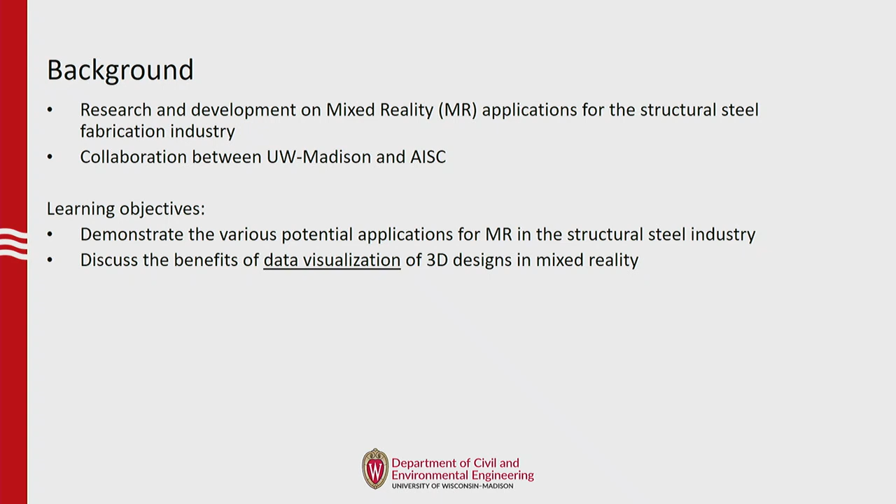So when we have holograms and they're overlaid onto the real world, we're augmenting the real world. That's AR, but ours is a little different because our holograms are going to interact with the real world. So that is mixed reality, because we're augmenting the real world and they are going to interact with each other. And if anyone here is not very familiar, this is different to virtual reality, where in virtual reality you're entirely immersed in the virtual world.

We need this mixed reality for safety reasons. You have to be able to see what's going on in the fabrication shop around you, and so that's why we're using this technology. Now, the most common mixed reality headset is the HoloLens 2 by Microsoft. You can control it with hand gestures, so no remotes, which is really good because you're going to be working with your hands when you are fabricating parts.

It's fully self-contained, so the HoloLens can work on its own, and Will will explain that. And also, you can connect wirelessly to other users or other devices. So if you have a project team in the office or elsewhere, you can collaborate with them in real time.

So first, we had an initial pilot study, which was supported by AISC's research and technology divisions. This was a nice collaborative project between structural engineers, me, and software engineers, Will's team. And we found that we could get a 1/16 inch accuracy of the hologram overlay onto the steel parts. That really told us that we could go ahead and continue with this research, because that was the minimum accuracy we needed to achieve to make this viable.

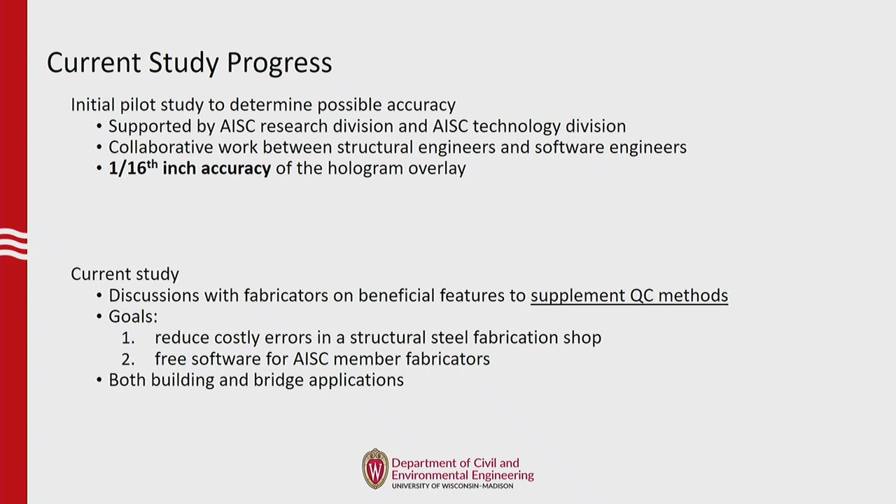Now, the applications we're studying are both for buildings and bridges. The demo you're going to see here today is a common bridge application, but we are looking at both building and bridge applications.

So the HoloLens 2 can overlay relevant information on the part that you're fabricating and assist with quality control checks. This can include bolt hole misalignment, incorrect edge distance, and it can display dimensions and measurements.

In addition, you can measure distances between points of interest. You can select the points and it can give you a measurement. It can also show you the correct orientation of the parts to be connected.

What's nice is the display of the user can be live streamed, so you can live stream it to someone in the design office. You can see the shop drawings in the HoloLens. You're going to see this in the demo.

And you can do voice to add a note at a specific part. So if there's something you want to note, you can use your voice and add that in.

Table layouts let you do a quick check of the individual parts. There's also a step-by-step guide to help you fabricate it. And what's nice is you can pull apart this finished connection to familiarize yourself with the sequence and how things go together, so you can be familiar before you actually start welding and drilling holes.

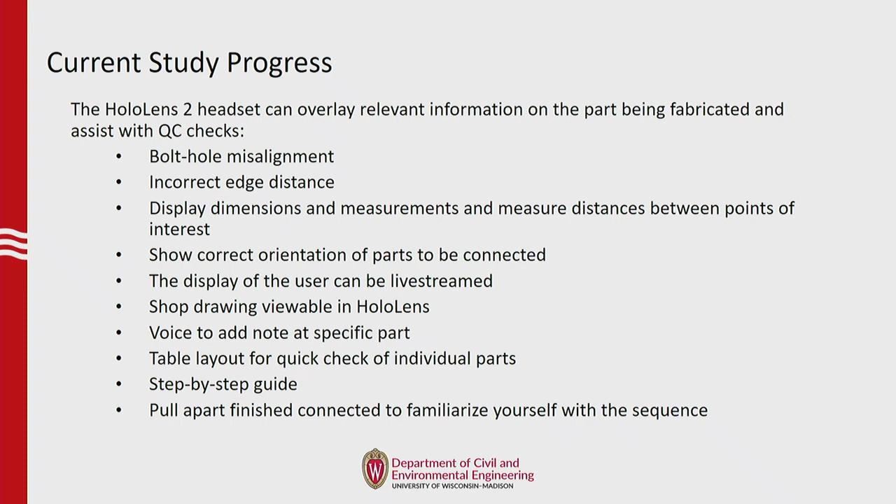This demo here is a scaled down version of the connection, but all the features will work fine on a scaled up version. With this, I'm going to turn it over to Will, who's going to give you a demo of this with all the features that we just mentioned.

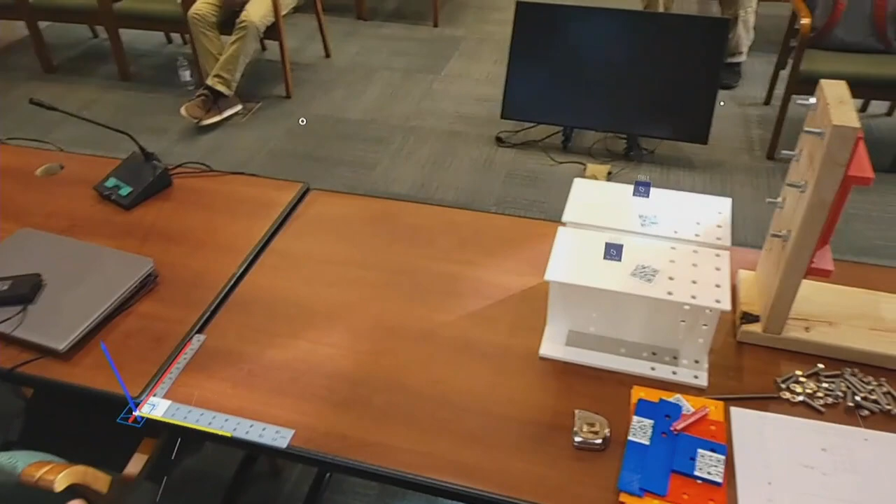All right, so this is a steel fabrication application. It is designed to help out fabricators right on the shop floor. Working with AISC and fabricators from around the area, we're trying to determine where it makes the most sense to ultimately improve the efficiency of a fabrication floor, but also reduce the costly errors that arise out in the field after it's left the shop.

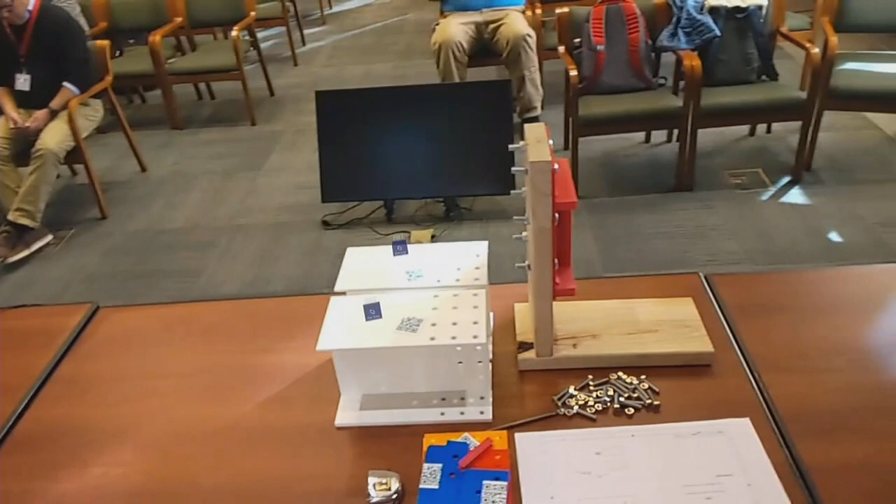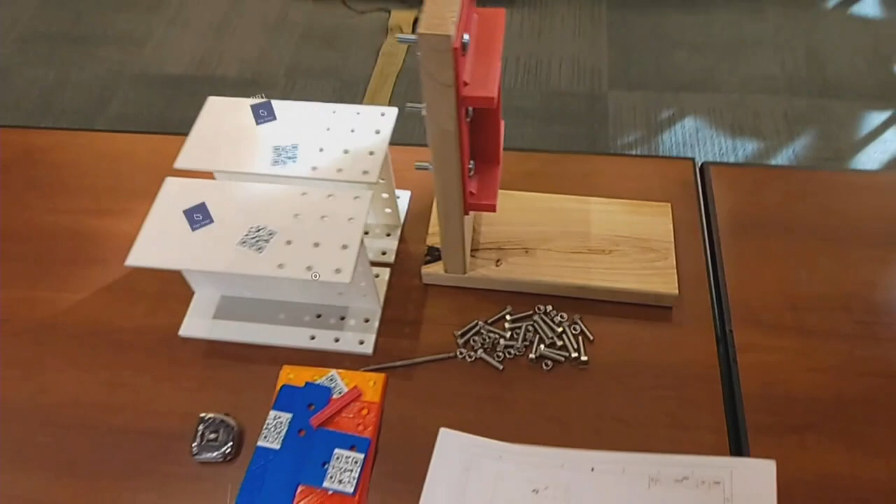So we're trying to catch all those issues before it leaves the door, and this is kind of where we decided to start, at least for this application. So we're actually starting with the shop drawings. You'll find that you have the shop drawings along with a bunch of the different pieces needed to make everything in this fabrication. It's about 6 pages long, and to keep the space a little clearer, we decided to add the shop drawing right into the HoloLens.

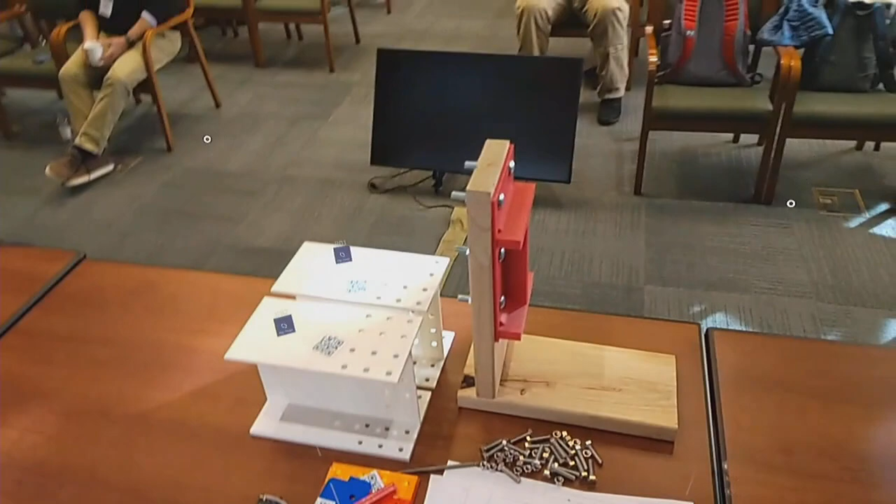So you'll recognize there's a bunch of QR codes all over, and that helps with alignment. That's how we're able to transition from the digital to the physical world. You can also just read things. I feel a little close with this one, but you can bring things up, and we could potentially add a QR code right to the shop drawings, and then there they are. You can get up pretty close to it. It does follow me around currently, until I just pin this here.

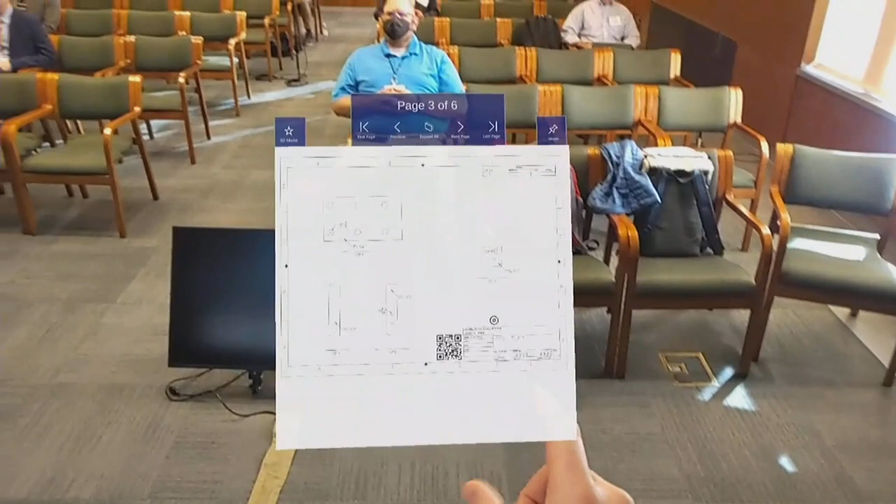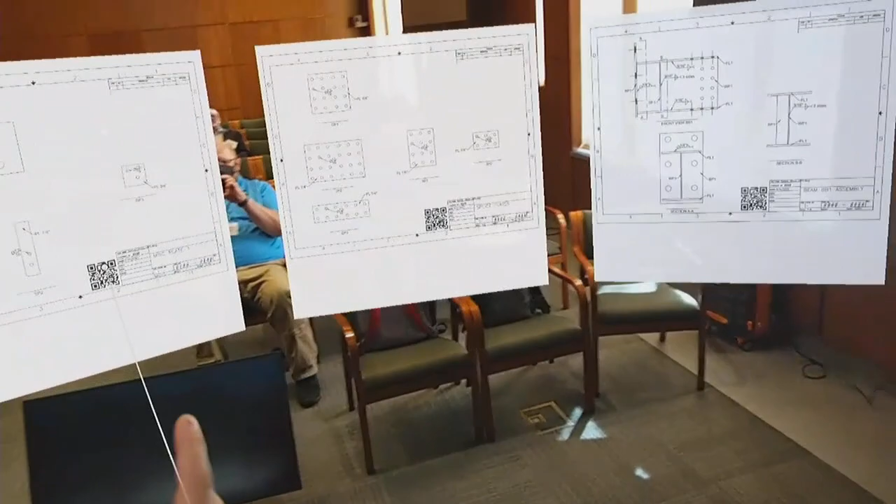And then you can toggle through them as you'd expect. So you've got all 6 pages there, or if you wanted to, you can expand it. You've got all 6 pages all together. Kind of intense, maybe a little overwhelming, but you're able to have everything out that you might need. You can expand it, make it as large as you need, and find what you're looking for a little quicker without cluttering your workspace. So there's all 6 pages. But again, that's still not necessarily our ultimate goal.

Our ultimate goal really is to take the existing files done by designers and give all the information that's still in those to the fabricator. Right now it's kind of being lost by just being in 2D. So we're going to bring up the 3D model here that I just put up.

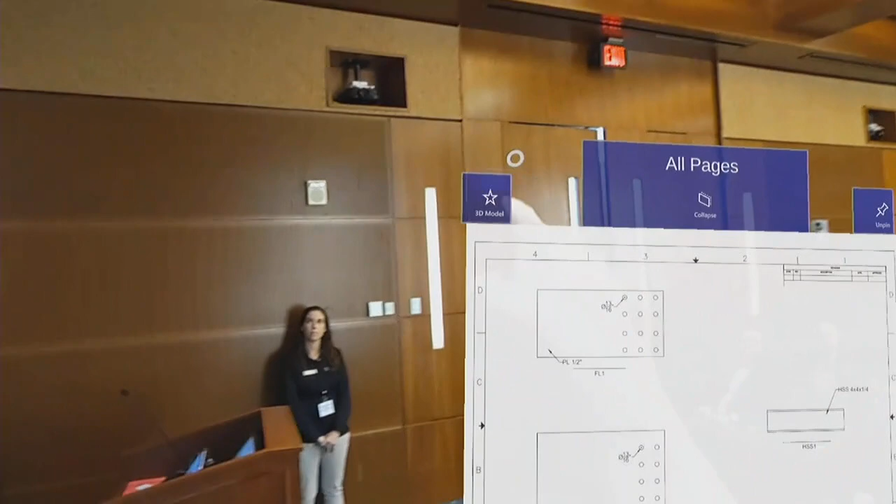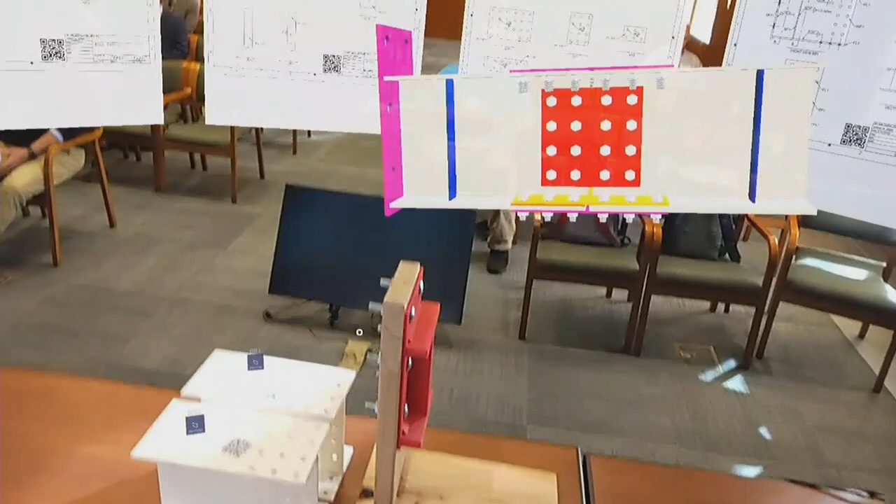So this is ultimately what we'll be building today. And with the HoloLens, you're able to just pick it up, move it around, interact with it. It's weightless. I learned that steel is heavy, heavier than I expected, so that's why all these are 3D printed parts. They travel better. But you're able to interact with things and get a better understanding of what you're fabricating right off the bat. We also added another feature to interact with the different parts.

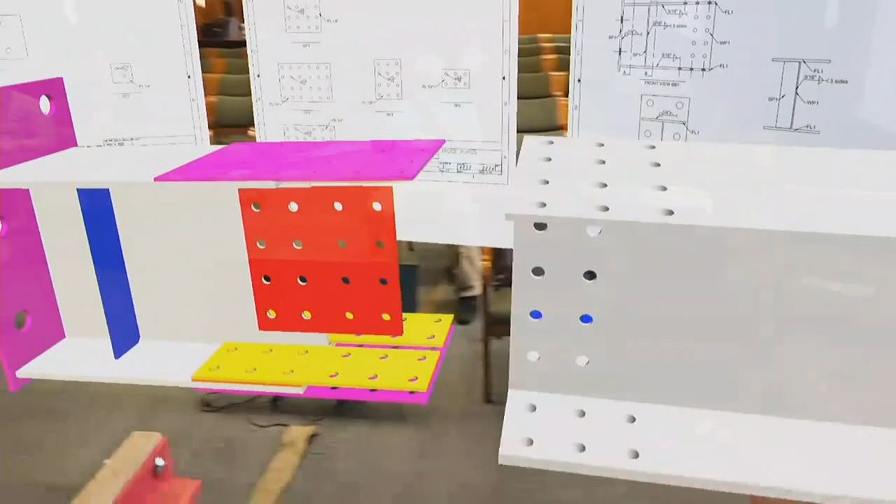So if you don't necessarily know how this goes together, if you're a novice fabricator, you're able to pull things apart and see, maybe in reverse order, how I'm going to fabricate this. This is more of a bolted steel connection, but if there are more welds, you might be able to interact and figure out what needs to go in which order. And work with this in a weightless state. It also creates kind of cool art too.

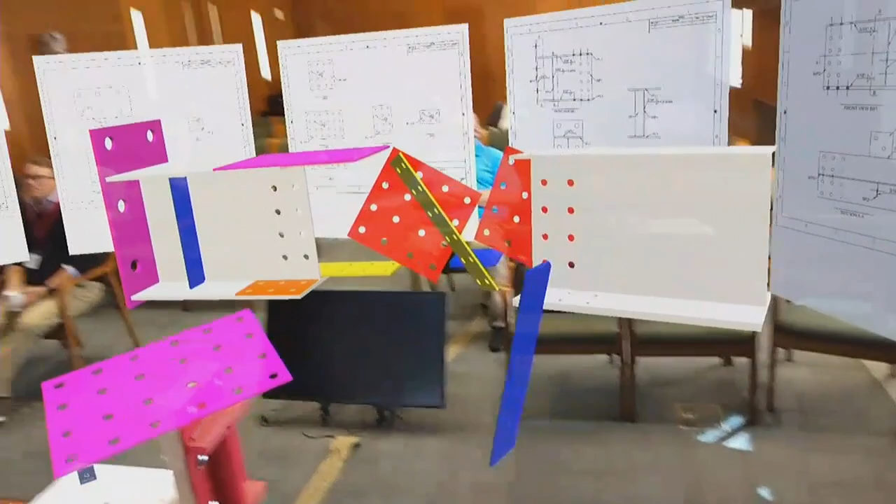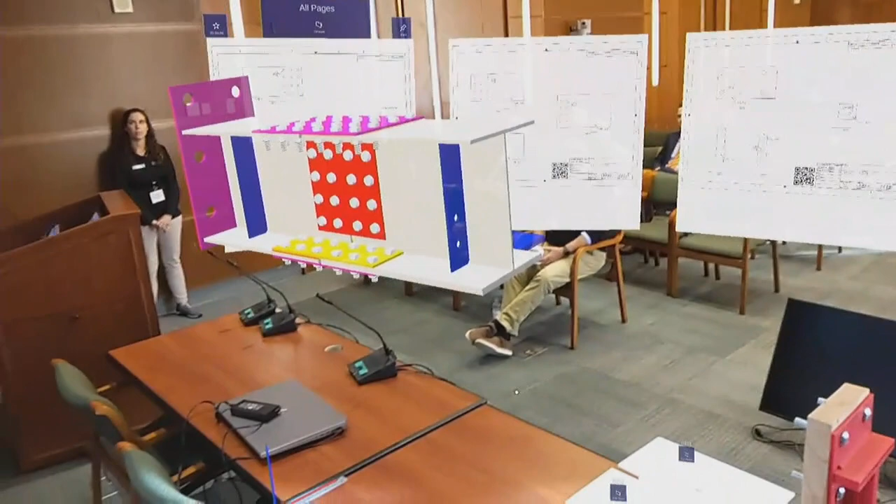All right, so that's the interaction. I'm going to turn that off. And then I'm going to turn that model off for now. So now we know what we're actually designing. I'm also going to get rid of that PDF too. Now let's actually fabricate it.

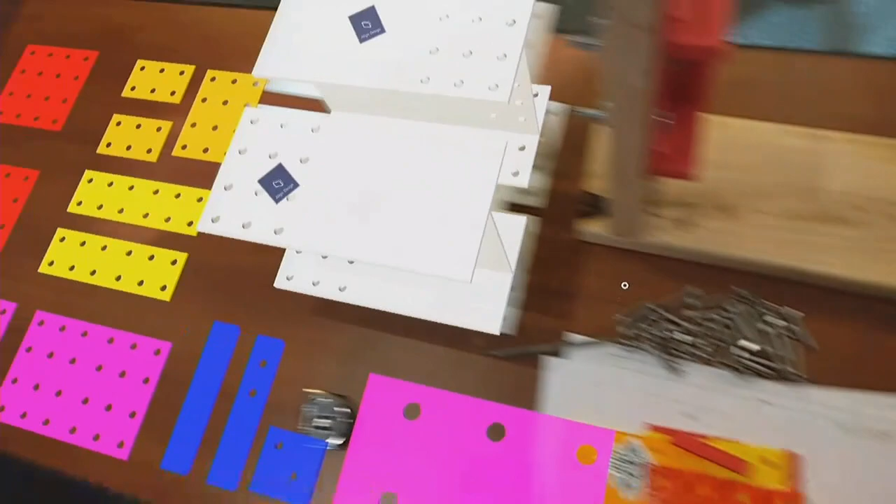So once again, you have all these different pieces, and you have all of the design information still in the file in the HoloLens. So what we could do is lay out all the different pieces on our table here to the exact size that these pieces should be. That allows us to do a quick QA/QC of all the different individual pieces. Let's see, basically start laying them out, make sure that they actually line up, and they should perfectly match. This is just a very quick way to make sure that we have all the pieces in the right size, the right shape.

Good, all the pieces, very good. But it's a very quick way to make sure that your pieces are actually fabricated correctly before you start welding it onto your final fabrication. So pretty good, awesome.

One looks like a potential problem. We do have some misalignment here, it looks like on the bottom. These rows look a little further down than they should be. We can revisit that in a little bit. These two line up, they look pretty good. Awesome, okay. All right, looks good.

And then that final piece is right up there for the sake of time. So here are all the different pieces. It's all laid out, it's looking good. Everything looks like it was actually manufactured correctly. Now we should investigate this last piece here because it's just a little bit off.

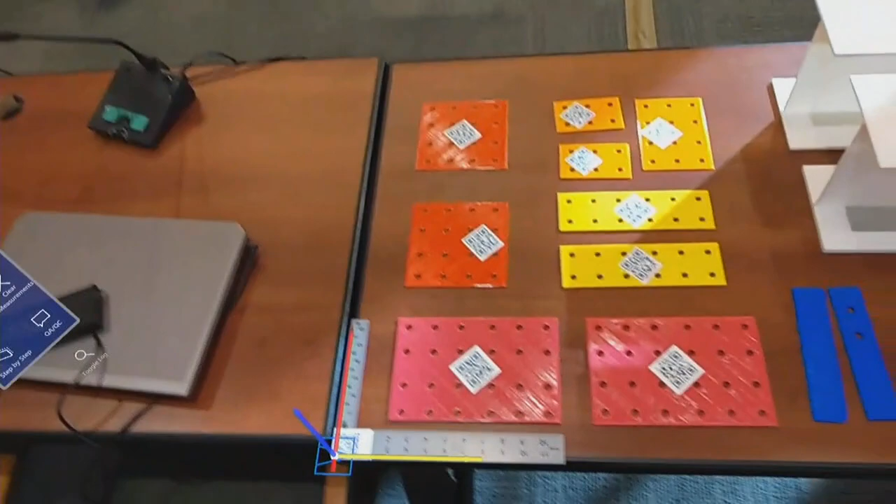As Dr. Blum mentioned, you can pull up some measurement points, is what we're calling them. Essentially what we're able to do is put this in line with the calibration square that we have there, and we basically say this is where we're measuring from. You can put this QR code basically anywhere on any of the pieces, and this is how we're able to align the two to get that 1/16 of an inch accuracy between the digital and the physical world. Keep bringing up the start menu.

All right, so there's the alignment, and that is pretty telling that there's definitely a nice alignment of those holes down here. We can even dig a little deeper if we want to, and bring up what we call our measurement points. Again, these are all just kind of wherever we see an important space that maybe needs to be interrogated. So we have center of holes, as well as edges.

For example, I'm going to make, let's see, we'll do these two here to try to get that center. This is another fun part that we're currently trying to fix, is spaces selecting these measurement points.

All right, so that's 5/8 of an inch. And so if I turn the overlays off here, and the table, all right, we can do a measurement quick, pull tape, make sure that we actually do have a correct piece. Definitely not 5/8 of an inch.

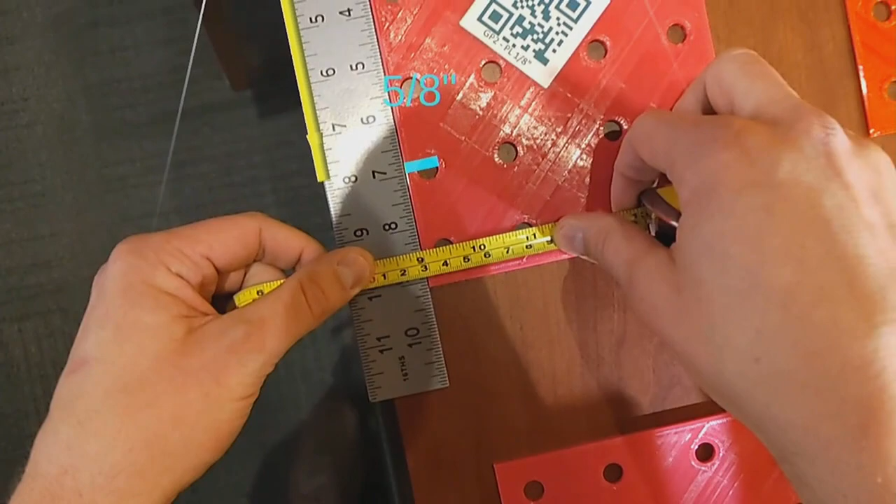I'm not sure how well you can see that, but basically, if we need a new piece, it needs to be fabricated. Dr. Blum, could you hook me up with a fixed piece?

That would be... There you go. Awesome. How did you do that so fast?

Incredible. All right, so let's go ahead and go line this up again. It's already looking better, but we certainly can also do a measurement here of 5/8, and we're all set.

Okay, so all the pieces, they're all set up. Once again, I'm going to just clear that measurement, and then we can bring back our table layout. All right, so we have all the pieces, they're all set up, we're all good to go.

Good. And let's finally fabricate it. So for this next part, it's a step-by-step tutorial.

We have our steps up here. It's all again in 3D. You can include this in some design files. This one has it, so we have the steps. The first one we've already done, we've already anchored that piece to the strong wall. Now this might not be exactly how you fabricate this together, but these are the steps I took.

All right, so the first piece, we're going to look at which pieces need to actually go in this step. So we're using this high-yield beam here, and we're going to place this and do the fastest weld on Earth. There it is. Whoa. And all right, that's step one.

Step two, got the two red pieces. They're flashing over here on the table, making it pretty clear. Obviously, steel is not all wonderfully colored like this, but all the pieces can still be given a color maybe, or you can have a way to label them. This is just ease of demonstration.

I'm just going to throw that on this for a little more stability.

Can you show us the steps you looked up? What's that? Which step? Step. Yeah, yep, so this is the current step that we're on. Okay, so that's the first step. Okay, yep, yep.

One more piece just to be safe. Excellent. All right, here's how you'll be. Orientation is this way, so go in. Good.

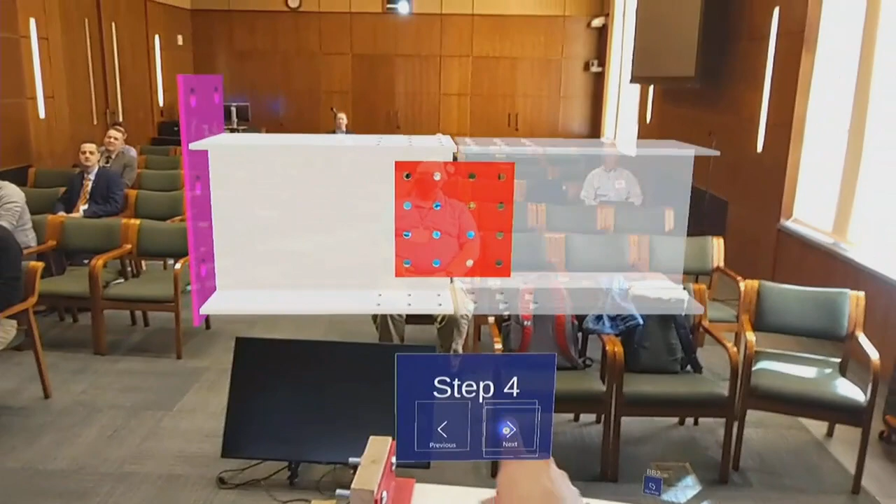Step 4, moving on to 5. All right, so this one. Got these 3 pieces. Now a novice might not necessarily realize that right now there's only 2 pieces that I see that are flashing. So I put these 2 out. You can grab this and we'll just take a look to see what that other one is.

It looks like, yeah, there it is. Excellent, so it's the same plate on the other side. Again, a veteran fabricator likely would know this, but if you're new here, making sure that you're using all of your parts, and you don't get down the road and realize you have to redo a step.

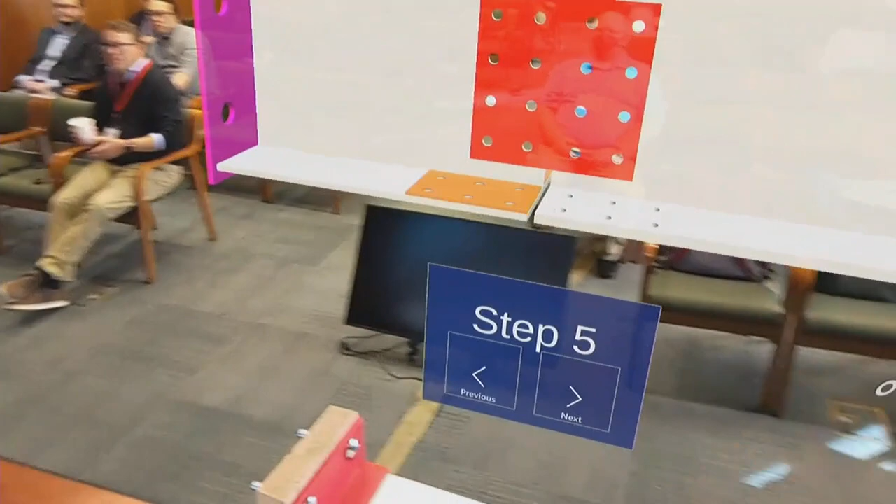All right, got these 4.

You can then reference each model, expected orientation, and which piece goes where. And the last piece, it's going to believe it's on the other side. No, it's there. I'm just going to place it.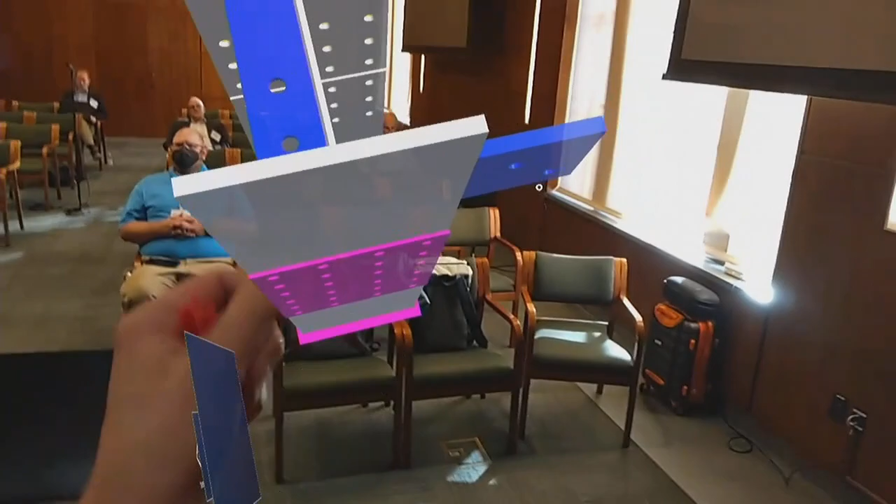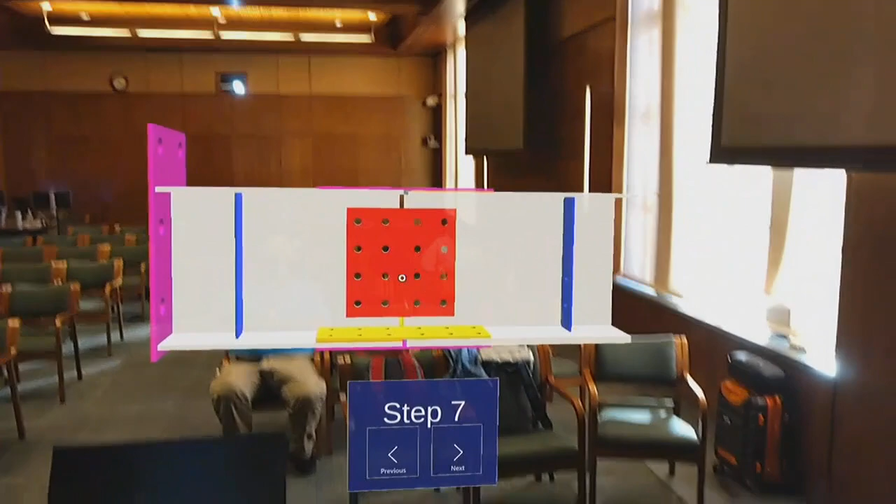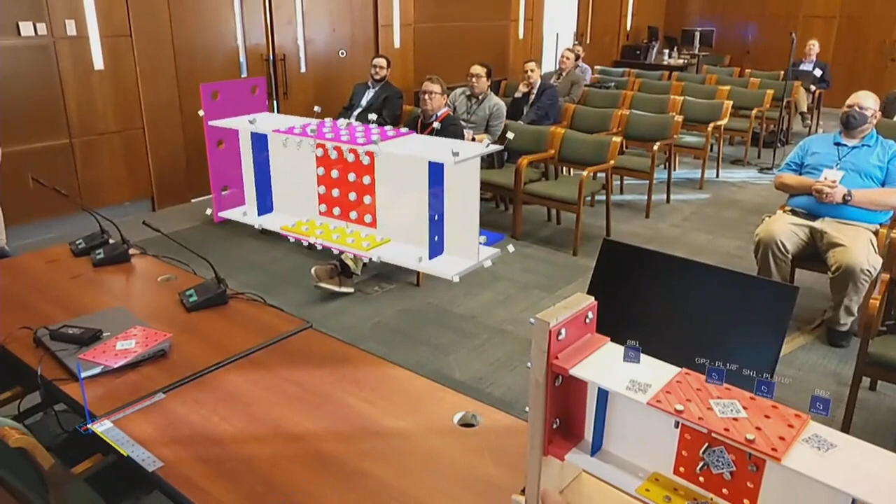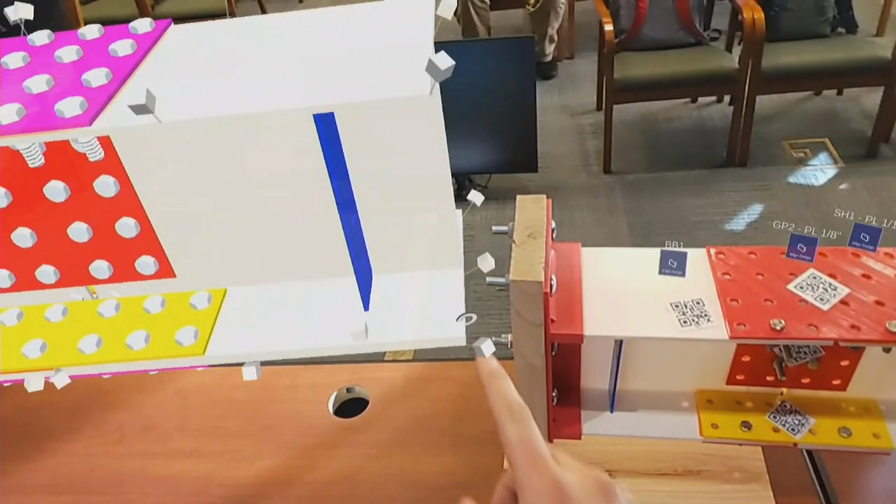The QA/QC feature allows you to ultimately take a look at this final fabricated piece, walk around it, and compare it with the final model. So let's bring up the full design again. With this full design, we have measurement points that you could use as a QA team to do some simple measurements, like this one over here on the end, to validate that it's actually in the correct place. It certainly does not look like I placed it very strategically, but for example, you pull tape and you realize that it's wrong.

And with the HoloLens 2, you actually have eye tracking as well. So everywhere that you look, you can have a cursor, and you can also have a microphone. So you can look at some location, which I'm going to look over to the right there, and say the words 'add note.'

Usually it doesn't work the first time, but the second time it does. Add note. No, it's not there yet. Oh yeah, there we go. All right, add note. There it is, look at that. So that's where I was looking, and then we add a little note here.

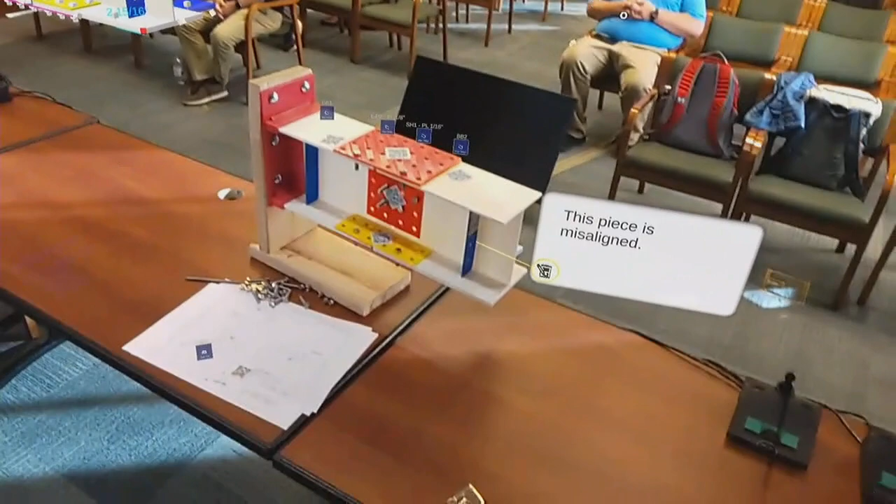We should be able to then do some speech to text: 'This piece is misaligned, period.' All right, simple note. Future enhancements could definitely include a picture, but that's one way to do it, and of course it's going to take a picture.

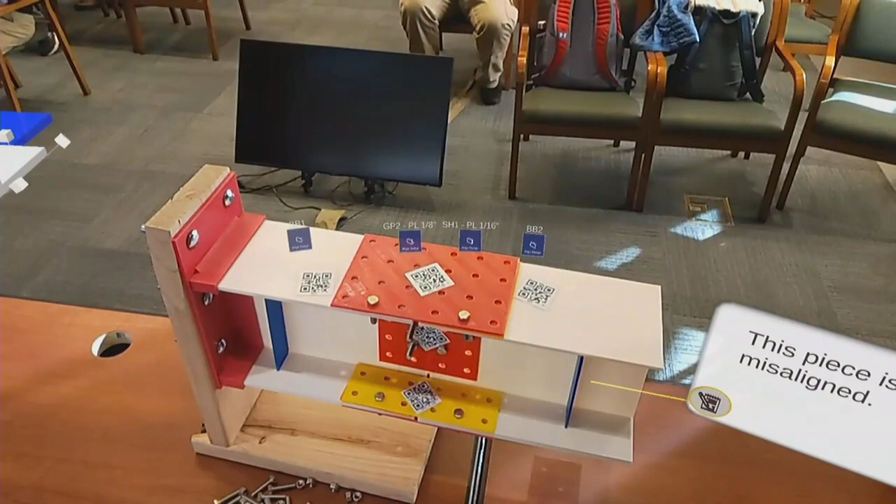We also could look at other places. There it is, add note. Add note. Still a pilot feature, clearly, but again, it's a simple way to potentially walk around the actual finished piece and add simple notes that can be sent back to the fabricators to be fixed.

So I hope, at least through all these little demos, you're able to recognize a bit more about what's possible with the existing files. We didn't modify any of that. This is just data visualization in a different format that ultimately can be beneficial to the fabricator.

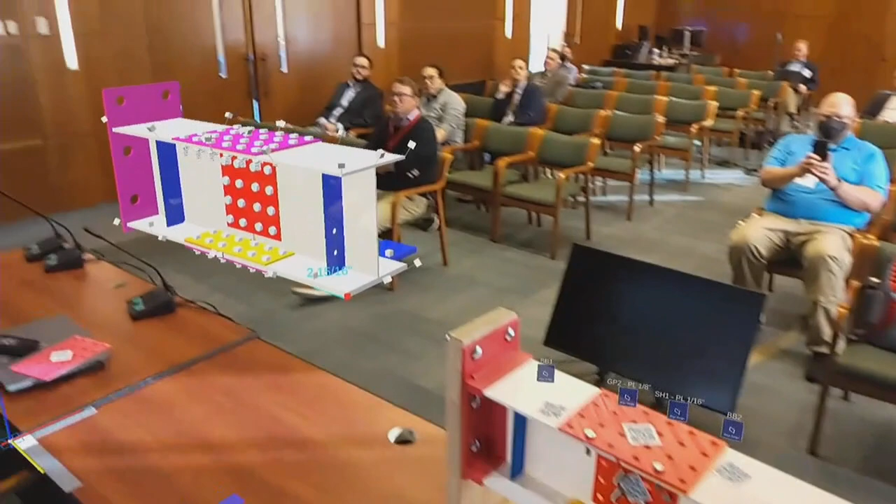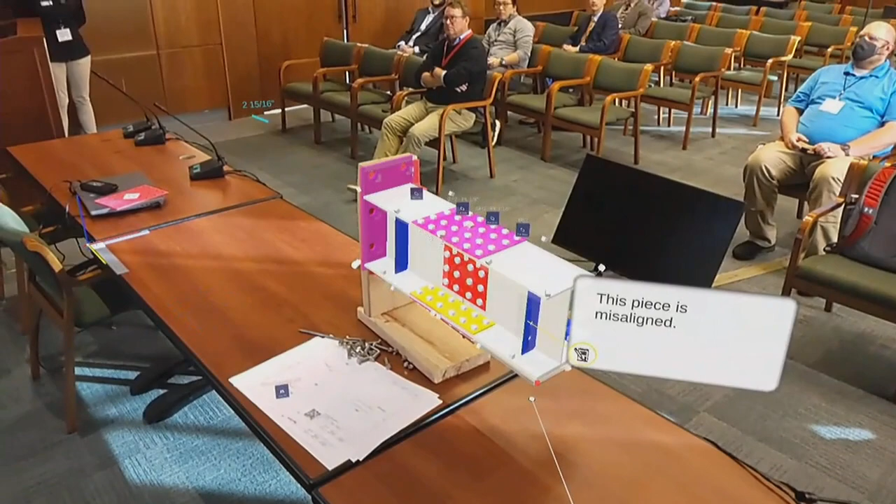I think that'd be something to look at. Yeah, absolutely, it's interesting—because kind of like you do with the parts, you know, right, see it all, yep.

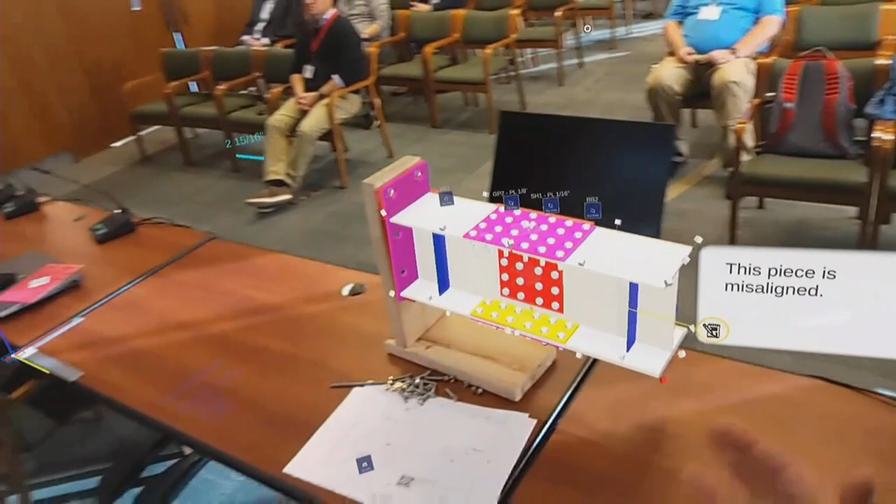The difference with this is, when you wear the device, there is some transparency potentially, and so it's a battle a little bit between seeing the digital model and trying to see the physical. When you lay it like this, it's hard to see, at least in my vision right now, the actual physical object behind it. So having that reference is potentially easier.

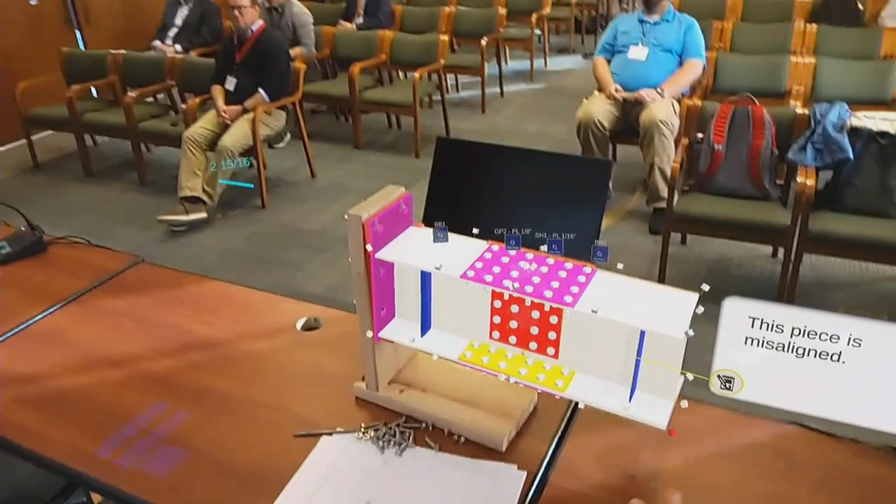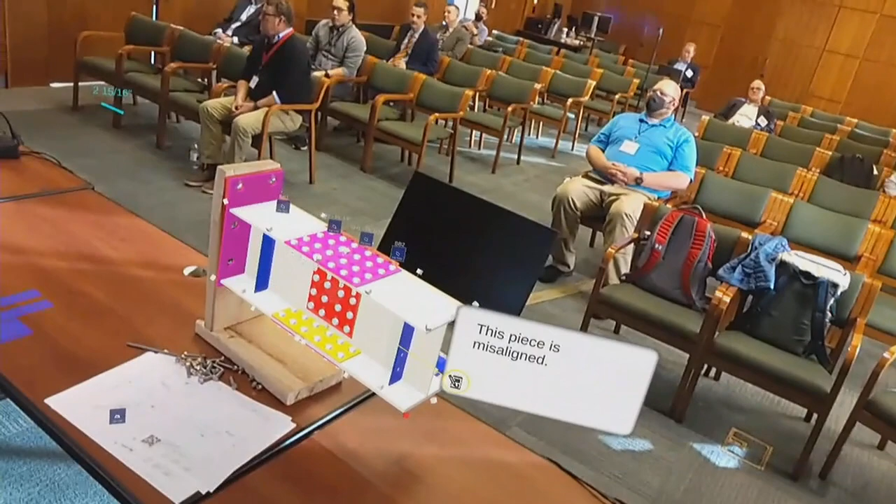It's also difficult with longer beams, so certainly the steel bridge connections will be way bigger, and it might be easier to actually shrink that down but still get the right measurement for a certain part of the connection bolt. So for the bolts, is there any way to encapsulate the foot-pounds or how much torque is needed on each of the bolts or different points? Potentially, but nothing from this device—it would have to be an external device to do that sort of measurement. So you still need to reference the paper documentation. Yes, but it could be included as information for the QA/QC person.

Absolutely, cool. Well, that'll send it back over to Dr. Blum for closing remarks. I can also move this over. Should we just think? Oh.

All right, well, thank you, Will, for that. Almost. No.

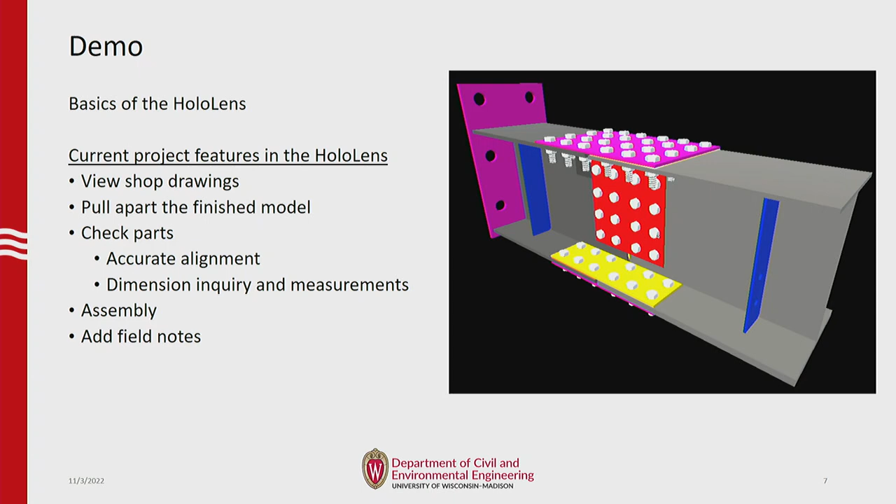Thank you, Will, for that nice demo.

Some future work we want to continue with this project is integration with standard files, for example Tekla or other standard design software files that fabricators use. We want to have this include weld information on the holograms, which we currently don't have. As you notice, we focus on bolts.

And we want to improve the automatic documentation of any issues and errors to potentially save time. This includes capturing images of any areas that have deficiencies.

We want to look at using data analysis techniques to optimize viewable dimensions and information. There's a lot of dimensions on each connection, but not all of it needs to be viewable at any instance. So consider if you bring in that data file, what should actually be viewable, what should be viewable at each stage, and maybe what should be viewable depending on where your eyes are looking.

We also want to consider collision identification with other building layers or MEP, and we can do that by integrating with other files.

We also want to use this as a training tool, so we want to expand the step-by-step guide for assembly. And we want to be able to record disassembly, you taking it apart, so that someone who's experienced could disassemble it in reverse order and give it to someone who could use that as a training tool where they would assemble it based on the disassembly video.

And of course, if anyone here has suggestions, let us know what would you like to see or what would benefit you, and we're happy to hear your ideas. We're hoping to make a tool that will be beneficial to the industry.

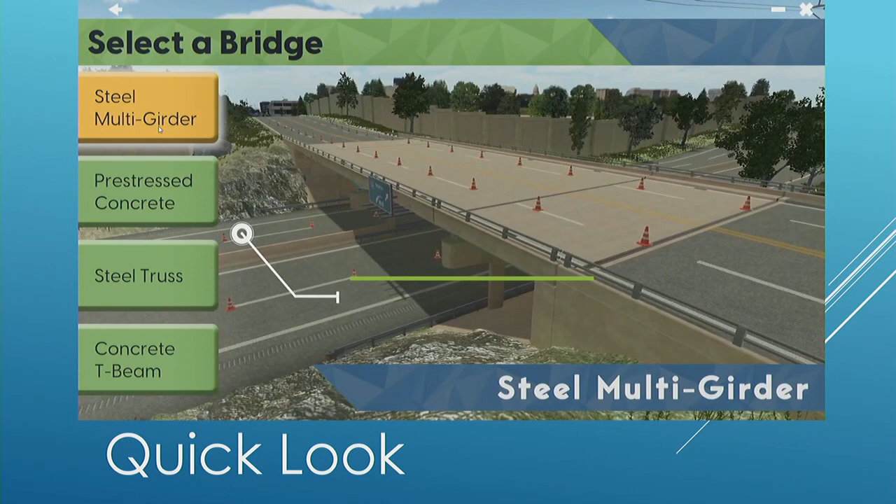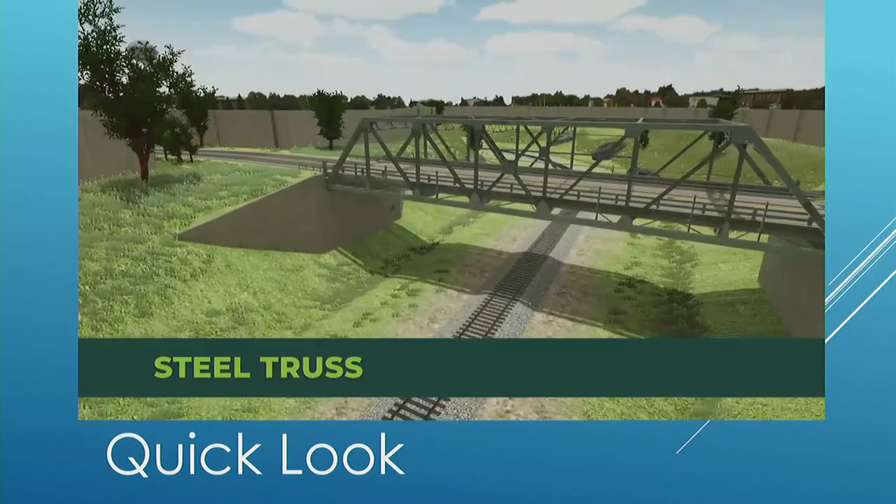And earlier this year we began work on a virtual reality version. Originally it was just a desktop application, but NHI has decided they want to give it a go as a virtual reality one and see how it gives different benefits to the desktop application. There's 4 different bridges you can pick from, meant to give you as many different possible defects to find as possible.

Hammer, tape measure, markers, chain drag, crack cards, things like that. And the whole point is to make them as familiar as possible with the tools that they'll be learning about in the class.

You can pull up additional information about defects. So if you enter a zone where there would be a defect, you get a little warning in the top right corner. If you hit the appropriate button, you get more information about it, like a refresher on what this type of defect is or a recommendation on what kinds of tools to use.

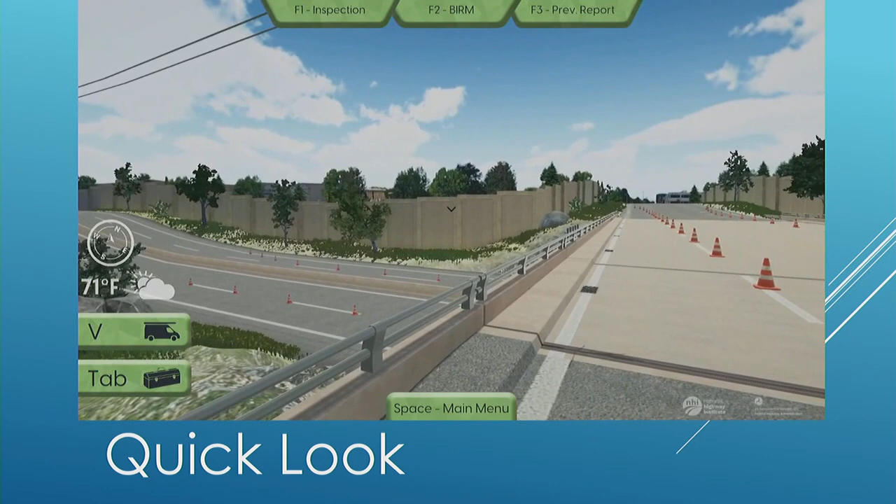One of the other points that NHI was very adamant about was being able to access the documentation. Normally they have printout versions of previous inspections or the BIRM, the Bridge Inspection Reference Manual, and they wanted to access that digitally as well so they didn't have to worry about printing it out, and also for ease of use.

One of the main things we wanted to do was make this as user-friendly as possible, and I'm going to talk about some of the things we did for that.

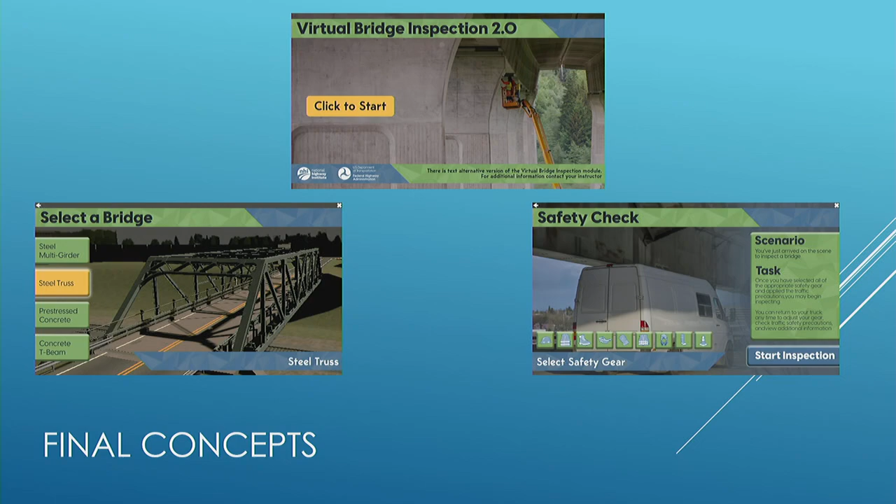Now we're going to talk a little bit about the programming—again, more my bread and butter, so apologies if this part's a little longer. I broke it into three stages: being a project that we were picking up, we had to do some translation and some interpretation, and then finally some creation, which was really the fun part of it.

When this project was originally done, Unity let you write in JavaScript or C#, and nowadays you pretty much have to do C#. That said, the original code had no comments, so a lot of it was me doing my best to figure out what they meant, because the projects didn't run anymore. I couldn't run it to confirm what something was supposed to do—I had to do my best to guess.

There were 14 existing tools, each unique with a bit of overlap, so we did our best to consolidate them. We also had to deal with navigation and any sort of feedback from the environment, like those inspection areas, or the hammer hitting blocks that fell—that sort of stuff.

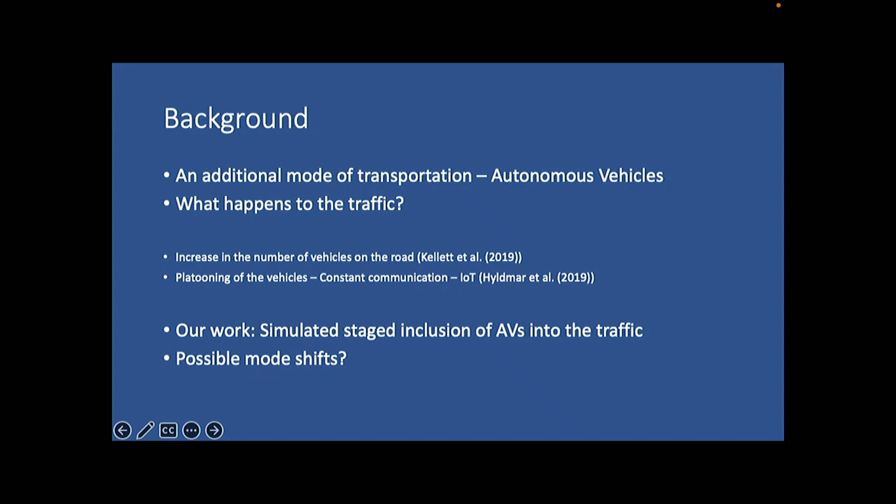So our work was about simulating the inclusion of AVs in the traffic and what happens to the possible mode shifts. This came from a survey we had done. Students were taking these rides along a span of about 2 months, and we collected all of this information.

What would you do? Most of them said that access to AVs would help them make existing trips, but also induce new trips they weren't going to make before. And that raised a question: would that increase traffic? That's sort of the theory around Uber and Lyft as well.

Although there's not great data on how much traffic has been added since, there's clearly a pattern that there are more vehicles on the roads now that there's an alternative. You don't have to take transit. If you don't want to wait for a bus to show up at your nearest station, you could just Uber your way through. So that was a concern.

And then 38% said that they would replace their personal vehicles and rideshare with AVs, and 27% would replace transit with AVs. So owing to that, we began the process of simulating.

There were 3 scenarios here. One was the base scenario, without any AVs in the traffic, to validate and calibrate the simulator itself. The second was the AV volume add scenario, so now there are AVs on the street, and over time the scenario explores the inclusion of AVs into the traffic with additional volume. What happens, and when is traffic level F reached, which means standstill, not much movement.

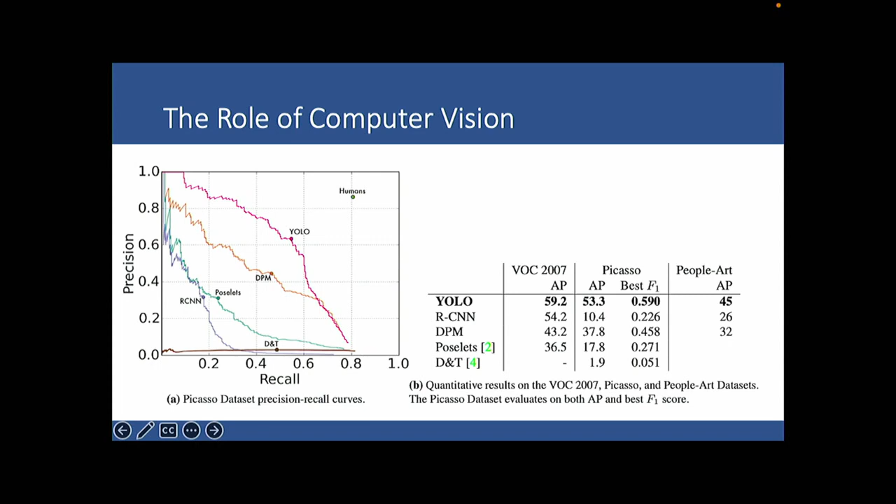It not just gives me the highest recall over precision in the models, it also gives a pretty good AP score. And then clearly humans are way above on the right—we do a much better job at detecting objects and understanding items and things.

How does it get calculated? Every grid box gets some sort of value, and then based on that, the confidence is calculated.

This is important for our models, because if it makes a mistake in identifying the object, it's not like anybody is necessarily dying, since this is happening in a very simulated, virtual environment. Having said that, if it doesn't detect it fast enough, that's the problem area.

A funny thing that happened in one of those videos is a pedestrian was walking, facing one direction, about to cross, then decided they didn't want to, stood there for a few seconds, turned left again, and started walking. The car couldn't catch that, so it jerked itself to a stop because it was too soon and didn't anticipate this. If the models aren't looking at those more subtle patterns, this becomes a much more difficult problem for an AV, let alone for my analysis, which is a little more basic.

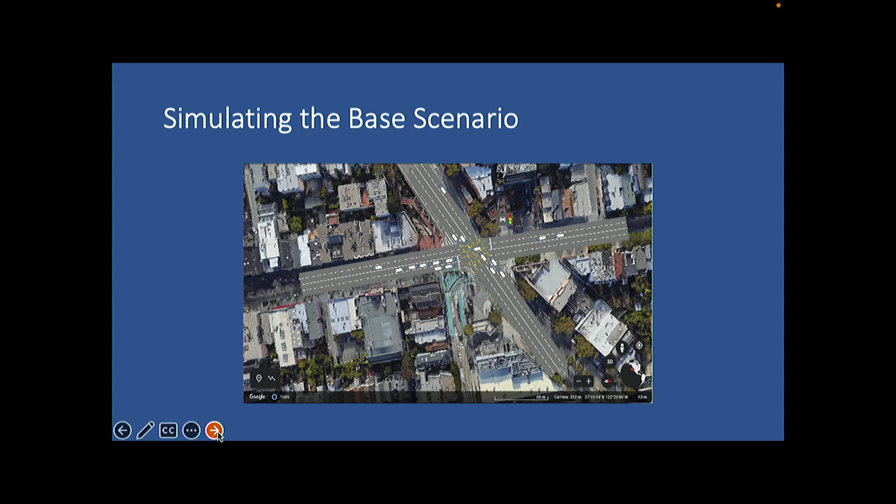So we did model delays and collisions. AVs usually do get into a slight bit of a collision environment because they get very, very close to another car sometimes when they're taking a right or left. The hardest part of the day for AVs is school drop-off time, when a bunch of cars on a very small San Francisco road stop to unload children, and then the car starts to go around it because that's what it's instructed to do. But that's not a good idea, it's supposed to just stand behind and wait until it's done.

So that was modeled. Some of the other things were - I think one scenario involved a huge trailer trying to parallel park, which has a tendency to take a right turn and then come back and park itself parallel to the road. So when it took a right, the AV kept going at its pace with an assumption that it's never going to change lanes, which was a little concerning.

So all of that was also part of the model, made sure that it was included in there. And based on the survey, we knew that 23% would replace either transit or rideshare with AVs, and roughly 10% would replace private cars with AVs.

Again, this is based on a university student level survey, so we realize that this is also an assumption and a limitation in itself, because student population is in no way representative of the larger population that will be using AVs or driving on the streets. And those students might also change their mind within 5 days, maybe.